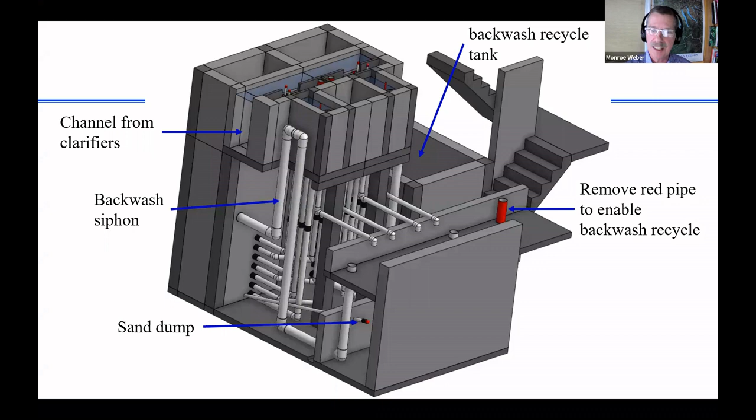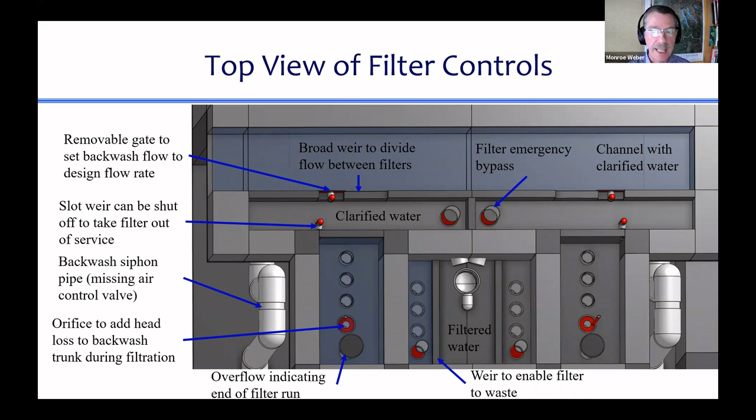And so the way we adjust it is we add some head loss, we add an orifice during filtration so that it doesn't get too much water during filtration. Somebody want to ask a question about that one? So if I didn't do anything during filtration mode, the bottom of the filter would get too much water because I've designed the bottom path to have less head loss, or bigger capacity, because it's got to handle the total flow of the filter when we're doing backwash.

Here are a couple slices now, section views, looking at the side of the filter. In this view, we're inside the inlet tank. And so you can see the 4 inlet pipes going down and dumping water into the filter. And here we can see inside the filter, and we can see that there's complexity inside the filter as well. Okay, so we see the water going in, water going out.

Oh, okay, and there's sand. If there were sand there, you wouldn't see anything. So happily, I didn't draw the sand, but I put some sand in there just for show. That's the height of the filter sand. During backwash, it's going to expand. We estimate about 30%.

So that means that our pi backwash over filter is the backwash height of the sand divided by the filter height of the sand. So that number is like 1.3. 1.3 minus 1 is 0.3. So there's this extra height of sand that happens when you're backwashing and the sand is fluidizing. And you'll notice that the siphon pipe that takes the water out during backwash is above that level to make sure that we don't take sand out when we're backwashing.

And do you see that each of those outlets serves exactly 2 layers? Why was I holding up 3 fingers? How about 2? Each of those 3 outlets is serving exactly 2 layers, because there are 6 filter layers total.

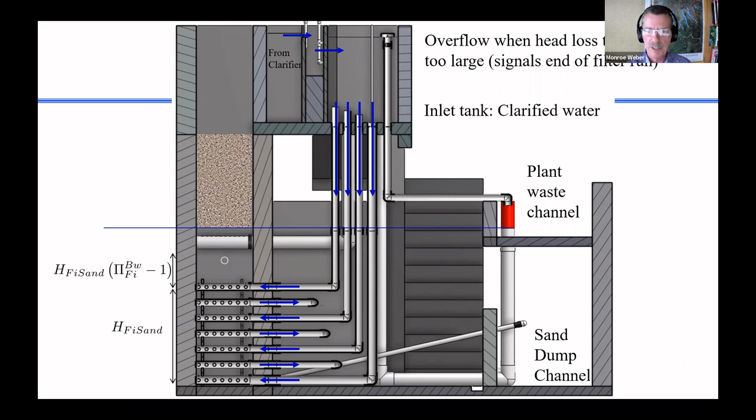If we go back 1, here, these inlets do different things. Look, the top inlet serves 1 layer. The bottom inlet serves 1 layer, but the inner 2 inlets, water can go either up or down. And so they each serve 2 layers. So you're seeing that these pipes are not all the same. Some of these trunk lines serve 2 layers of sand and some serve 1.

Okay, now we're looking at the siphon pipe. This is the pipe that takes the water out of the filter box when we are backwashing. So there are some orifices that you can just barely see here that are on the top of that pipe. They're taking the water out. It goes through, it's a siphon, and we'll learn more about that maybe today. And it discharges right here.

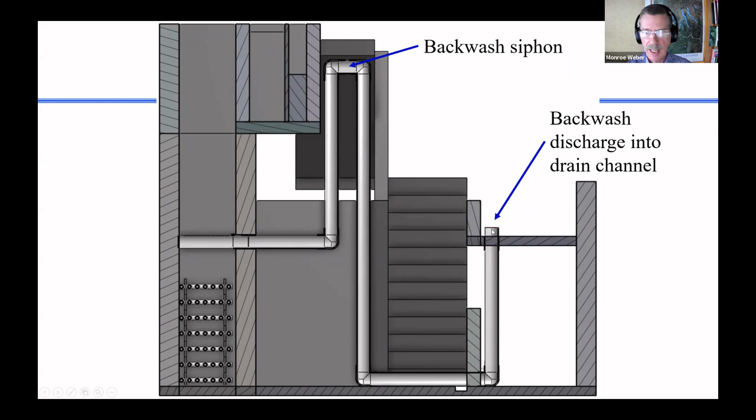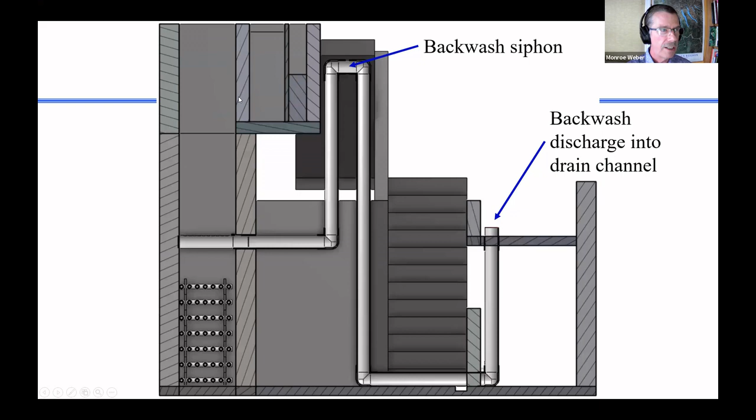And if you look at this pipe, there's something mysterious about it. There are no valves in this pipe, and yet under normal operation, the water level in the filter is up here somewhere. And so the question is, why isn't that siphon pipe just always emptying the water out of the filter? And we'll figure out what the magic is of that eventually.

We can also go into the filter box. So inside the filter box, there's a ton of stuff. So this is an end view. Here's where the inlets and outlets and backwash inlet would connect into this system of the internal plumbing. This doesn't show everything, but it shows a lot of the pieces.

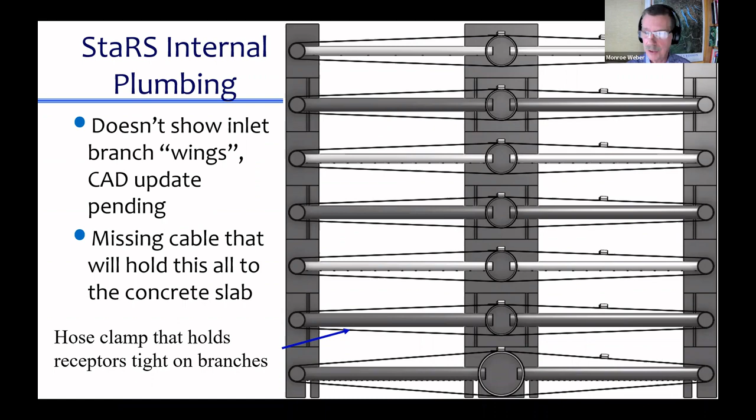These pipes here are receptor pipes. These pipes are branches, and these pipes here we call trunks. And then there are these hose clamps that go around one whole bundle of two receptors, the branches, and a trunk. These hose clamps hold it all together because this whole system can be disassembled. It's not glued together. So here are two other views of this same mess of plumbing.

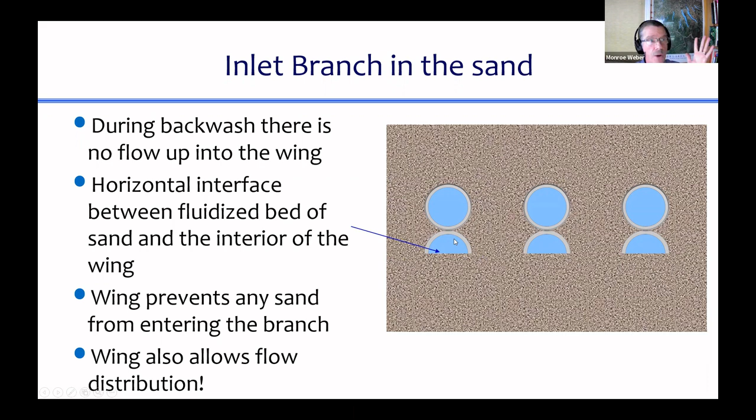I don't know if you've thought about 0.2 millimeters lately, but I think it's pretty similar to the thickness of your thumbnail. You can go check that on the internet and see if I'm right. But it's like you have to work to get your thumbnail into these slots. Okay, so really thin slots, so thin that the sand can't get in.

And so this is the same system that is used in wells, where if you have an aquifer that's got sand in it, you can put a well screen that is just PVC pipe with these slots in it, and that will prevent the sand from your aquifer from getting into your well, and you'll have clean water in your well. So we're using that same idea inside the filter.

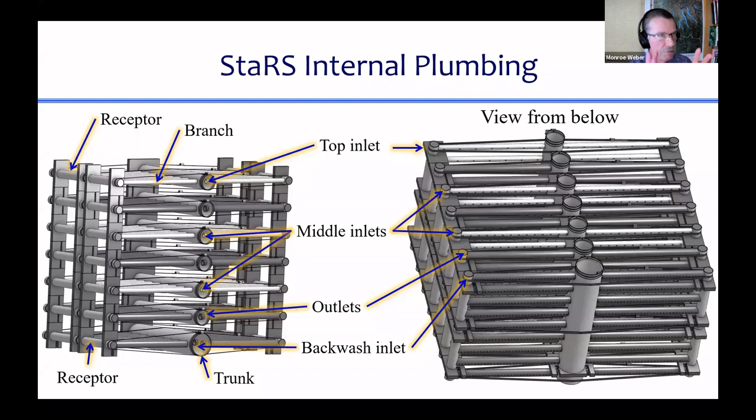That molded curve is going to connect to this receptor pipe out here. So here's the receptor pipe, and the branch fits into that receptor pipe, and the curve of the receptor pipe matches this crazy curve here.

So the hole in the receptor pipe is drilled to be exactly the same diameter as what I have my mouse on. And then this branch slides into the receptor pipe and it hits everywhere at once along this curved surface. Why did we do this? Well, we wanted a positive stop for one, because we're going to hold this together with a clamp. And we need this branch to not rotate.

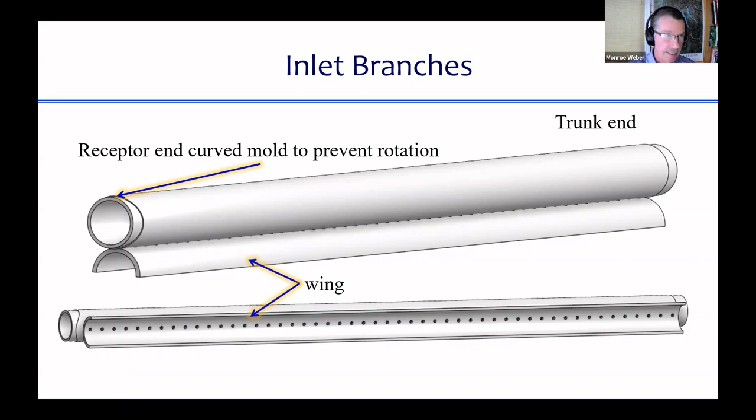And my question to you is, can you think about why? Is there any reason why you wouldn't want a slotted pipe to rotate? Like, who cares which way the water enters this pipe? But it actually matters. Anybody think about properties of a slotted pipe? I wish I had one here to show you.

And what forces do these pipes have to withstand? At the beginning of backwash, all the sand is pushing up on these pipes, and they are going to bend. And so we need them to be full strength. And so we need the slots to be coming out the sides and the strength to be in the vertical direction. So we can't let these rotate either.